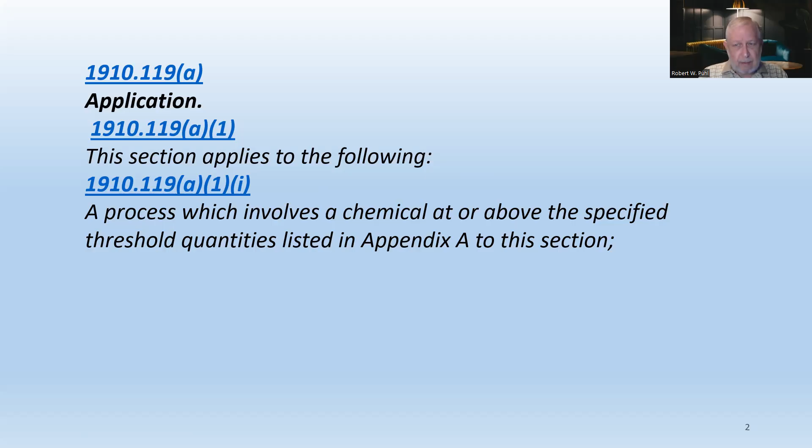So we're going to look at a part of it. This is just a very small part. This is what has the chemical name, the CAS number, and the TQ, which is threshold quantity.

You can see about the 6th or 7th line down, ammonia anhydrous. Anhydrous just means without water - pure ammonia. Ammonia is usually watered down; it likes water, it mixes with water pretty well. So anhydrous ammonia means without any water in it. And the TQ, the threshold quantity, is 10,000 pounds.

This appendix - most of the appendices in OSHA tell you if they're mandatory or not. This one's mandatory, that's for sure. And that's just the page with the A's in it. So that's a pretty big standard.

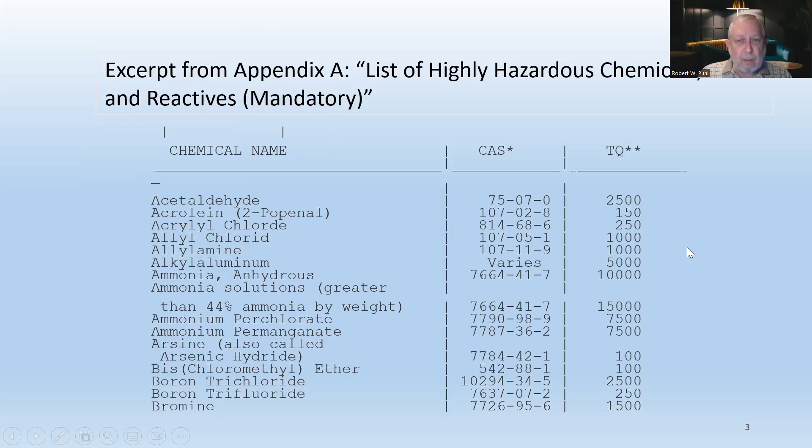So you need to make sure, of course, you have a chemical inventory under hazard communication, and you need to take that chemical inventory and look at Appendix A of this to make sure none of them are qualified under process safety management.

So a process which involves Category 1 flammable gas, as defined in 1910-1200 C, or a flammable liquid with a flash point below 100 degrees on site in one location in a quantity of 10,000 pounds or more. So this is saying, in addition to that, here's some other thing - Category 1 flammable gas, in 1910-1200, and that's your hazardous materials thing.

So that's another standard.

Hydrocarbon fuels used solely for workplace consumption as a fuel - for example, propane used for comfort heating, gasoline for vehicle refueling - if such fuels are not part of a process containing another highly hazardous chemical covered by this standard.

Flammable liquids with a flash point below 100 degrees Fahrenheit, stored in atmospheric tanks or transferred, which are kept below their normal boiling point without benefit of chilling or refrigeration.

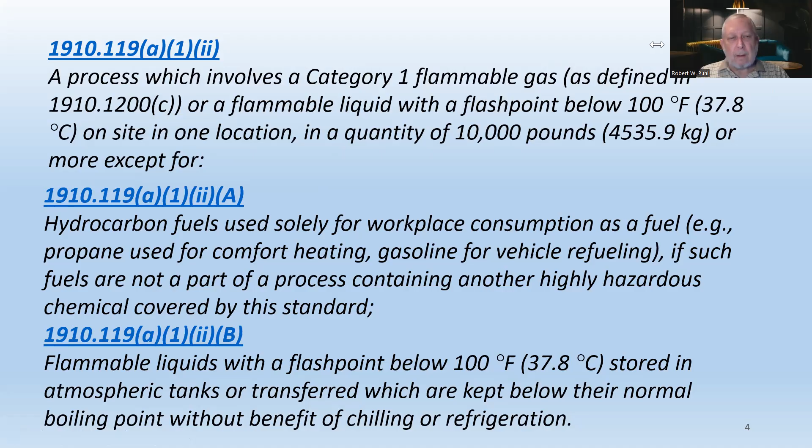This section does not apply to retail facilities - so it's a retail store, doesn't apply. Oil or gas well drilling or servicing operations - why? Again, because they've got their own rules.

Normally unoccupied remote facilities - normally unoccupied. In other words, somebody goes there once in a while to check on something, but normally there's nobody there.

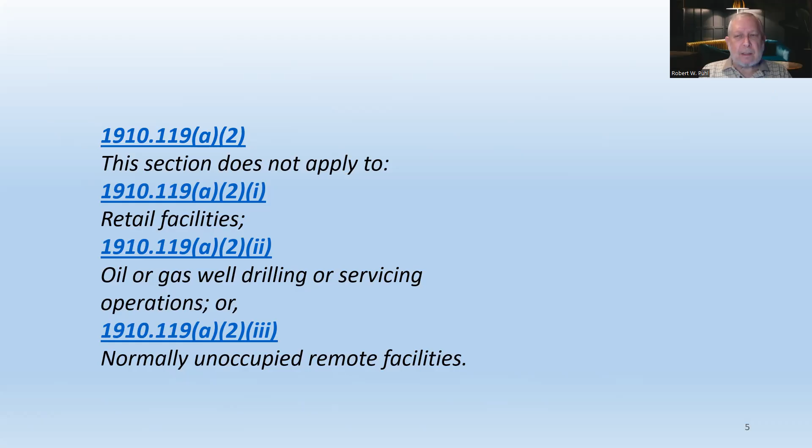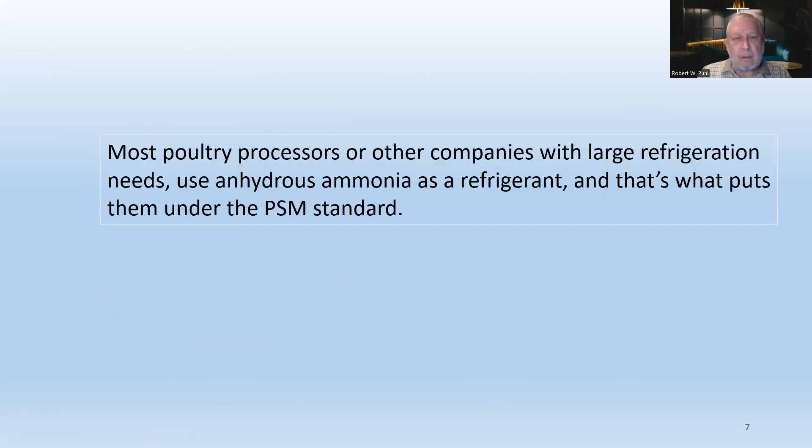Element A tells us who comes under the process safety management laws, and in some cases who doesn't. So that's what we talked about here. Most poultry processors or other companies with large refrigeration needs use anhydrous ammonia as a refrigerant, and that's what puts them under the PSM standard. These are just my notes here. So that was A, just kind of application, who it applies to.

Now, B is definitions, and most OSHA standards as big as this one have definitions. We're going to look at them.

Catastrophic release means a major uncontrolled emission, fire, or explosion involving one or more highly hazardous chemicals that present a serious danger to employees in the workplace. Well, if you have an uncontrolled emission, fire, or explosion involving a highly hazardous chemical, it's probably going to present a serious danger to employees in the workplace.

Now, remember, they say employees because this is OSHA - OSHA doesn't have any jurisdiction over the public, just the employees. That's where the EPA comes in; they cover the public. Process safety management is one of the few standards that is word for word identical in OSHA and EPA, except OSHA starts each section with 'the employer shall,' because OSHA covers employees. The EPA starts off each section with 'the owner or operator shall,' because they're concerned about the public and the environment.

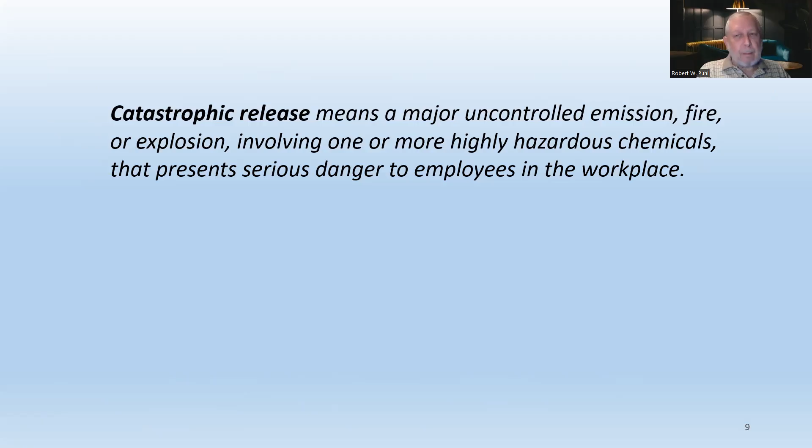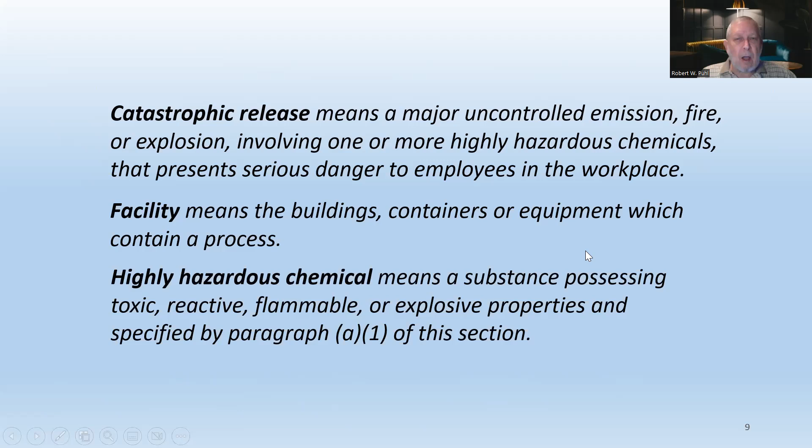It's interesting. But facility means the buildings, containers, or equipment which contain a process. Highly hazardous chemical means a substance possessing toxic, reactive, flammable, or explosive properties, and specified by paragraph A1 of this section, which we already talked about - and here's the part of A1. Okay, that's what we already talked about, so I'm not going to read it all again, but that's where that comes from.

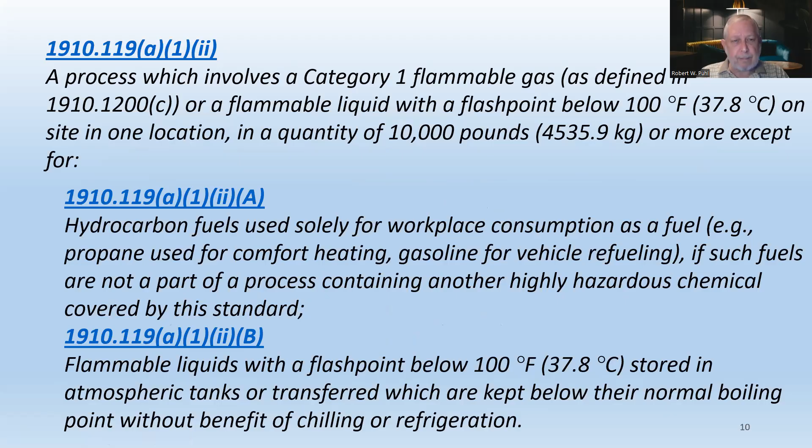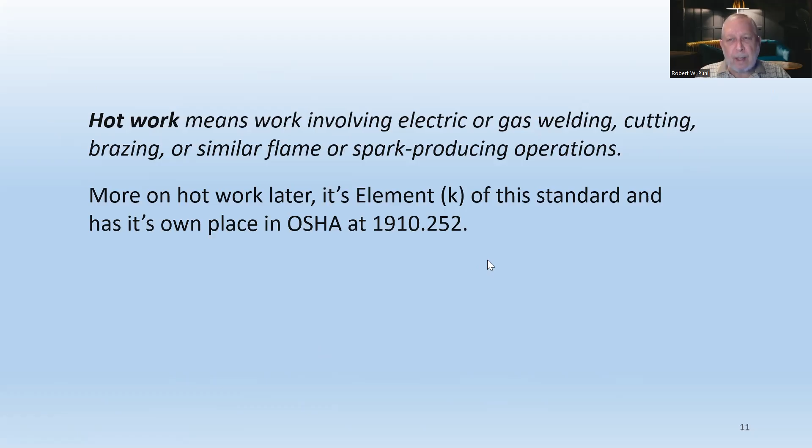Hot work means involving electrical or gas welding, cutting, brazing, or similar flame or spark producing operations. Hot work is a word that's used in a lot of sections in OSHA, but that's what it means - basically welding, cutting, brazing, grinding, anything that produces sparks, that's hot work. More on hot work later - it's element K of the standard and has its own place in OSHA 1910.252. So you can see hot work permeates several different OSHA standards.

Normally unoccupied remote facility means a facility which is operated, maintained, or serviced by employees who visit the facility only periodically to check its operation and to perform necessary operating or maintenance tasks. No employees are permanently stationed at the facility. Facilities meeting this definition are not contiguous with and must be geographically remote from all other buildings, processes, or persons.

When OSHA makes an exception like this, they have to be as meticulous as possible about defining it, because what will happen is people will try to start taking the exception and applying it to everything. So they kind of made it pretty clear here. I think they did anyhow.

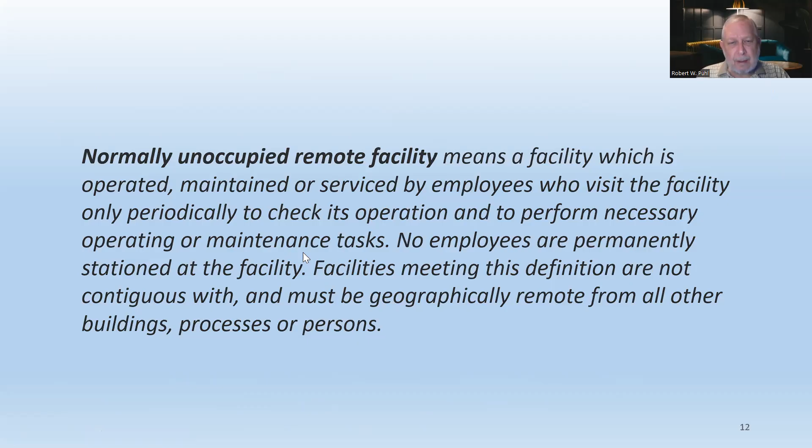Process means any activity involving a highly hazardous chemical, including any use, storage, manufacturing, handling, or the on-site movement of such chemicals, or combination of these activities. For purposes of this definition, any group of vessels which are interconnected, and separate vessels which are located such that a highly hazardous chemical could be involved in a potential release, shall be considered a single process.

So again, they want to be sure that you didn't just take these things and put them in different tanks and say, oh, we only have 5,000 here, 5,000 here, 5,000 there. We don't have 10,000 at one facility.

We had an issue because plant one and Reed Lane at OK Foods combined only had about 7,000 pounds of ammonia, while plant two had like 35,000 pounds. They were both under the same, kind of in the same building. I mean, you could get from one to the other without going outside.

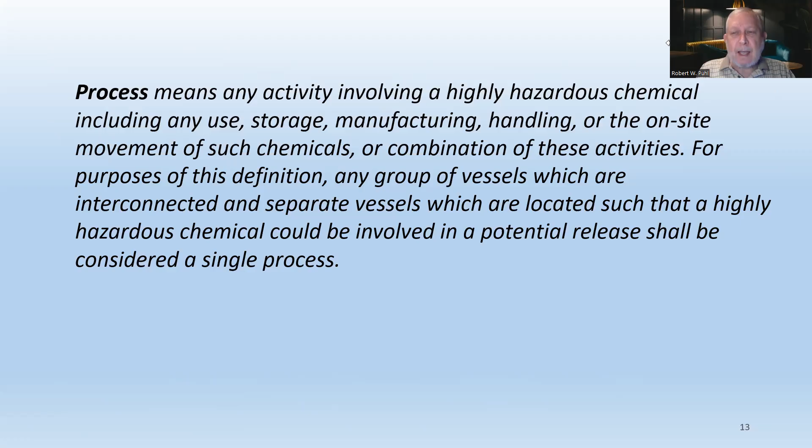So we included plant one and Reed Lane in it for a couple of reasons. Number one, they probably were in another area and by this definition come under it. Number two, we thought, look, if we don't do it and we have a problem there, they're going to say, wait a minute, you knew what to do here with this plant, you knew what rules to follow, you didn't follow them over here. How stupid is that? And you're probably going to be in trouble.

Replacement in kind means a replacement which satisfies the design specifications. This comes up a good bit in practice, because you have a valve, let's say, or something that needs replaced in your covered process.

Now, the first thing people think is they have a valve that's by company A, so they have to have a valve that's by company A. No, you don't have to have that. It has to be replacement in kind. In other words, it has to have the exact same specifications - the input, the output, the capacity of it, the operation of it, exactly the same. It could be a different brand.

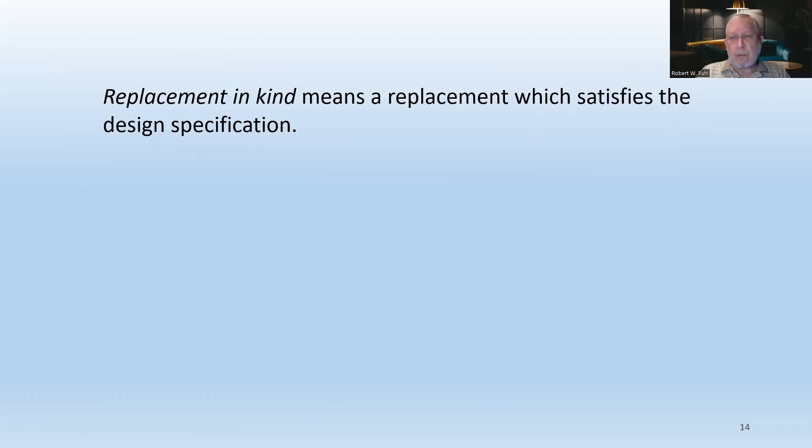Now, if you do that, replacement in kind, it exempts you from going through some other process, which we'll talk about later. But replacement in kind is an important term in process safety management. If it's not a replacement in kind, it triggers such things as management of change and pre-startup safety review, which we'll talk about later.

So again, it has to meet exactly the same specifications. It can't deviate at all - not at all, except the name can be different. It might be a different color or something like that. It might look a little different, but the specifications have to be the same.

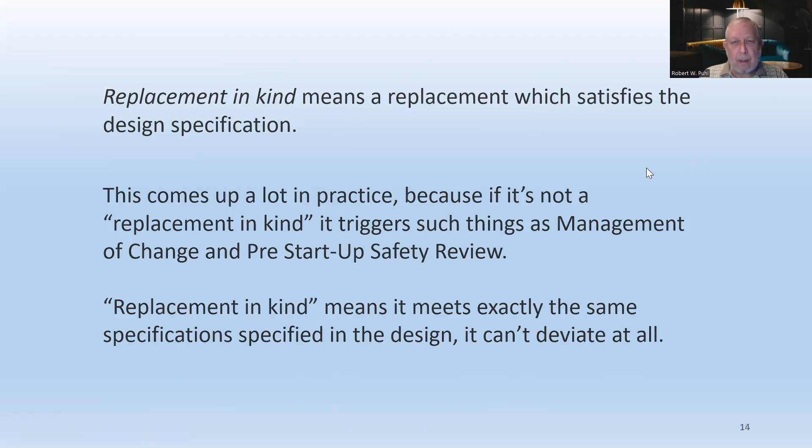Trade secret means any confidential formula, pattern, process, device, information, or compilation of information that is used in an employer's business, and that gives the employer an opportunity to obtain advantage over competitors who do not know or use it. See Appendix E to 1200, definition of trade secrets, which sets out the criteria to be used in evaluating trade secrets. And again, they're pretty strict on this too, because you can't really get out of OSHA by calling something a trade secret. You might have to jump through some hoops, but you're not going to get out of OSHA by saying, well, it's a trade secret.

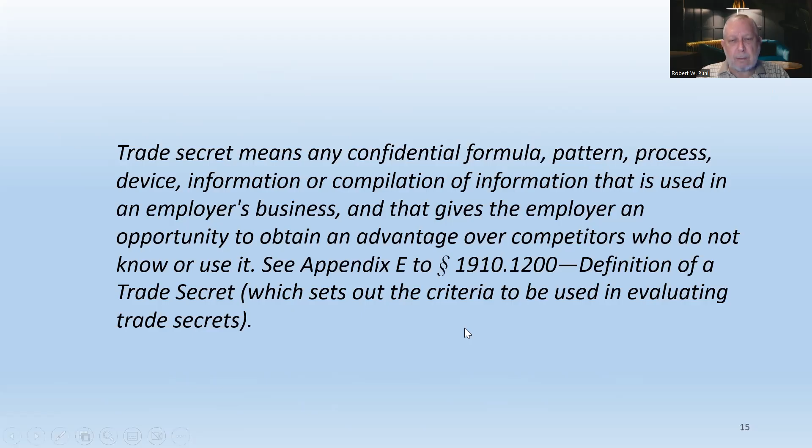Frequently, facilities use this section to add any other definitions that they may use in their program. So what we did, and I suggest you do this too, is for every section - like this is section B, for example - we broke our process safety manual into sections, one for each section of the standard, which makes a lot of sense. At the beginning of each section, we put word for word the standard, in italics, so you can tell it apart, and because they're not that big, as you can see. So we had the standard right there in our manual, and then we wrote below that our policy to enforce that standard. I thought it was a pretty good way of doing it, and Craig taught us that too.

So, employee participation. OSHA likes people to be notified of what's going on around them. And you know what? Companies should too. Employers shall develop a written plan of action regarding the implementation of the employee participation required by this paragraph. Again, it's got to be in writing. So they've got to say, what are you going to do? That written plan, that's key, is that it's written. You can't just be doing it. You have to have a written plan to do it.

For example, it's okay if we do this during orientation. We gave them a handout. They signed, maybe a short quiz about it. We told them about it. We told them we have anhydrous ammonia. It's not a secret. You can't keep stuff like this secret from your people. We gave them an orientation quiz. It was pretty short. Anyhow, PSM posting, we did that. We'll cover that in a little bit.

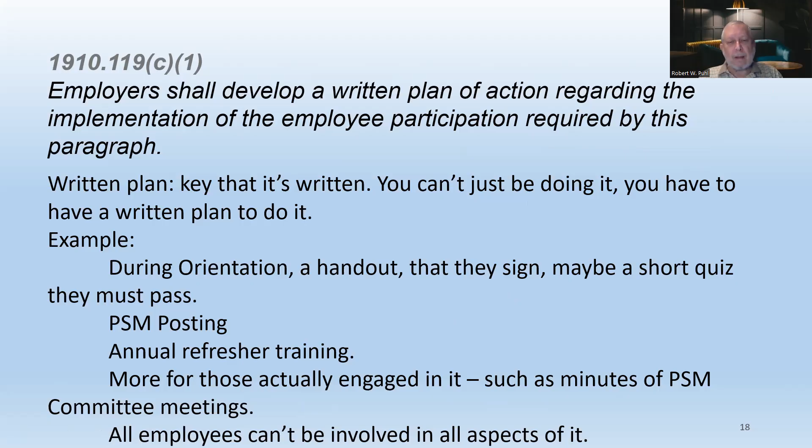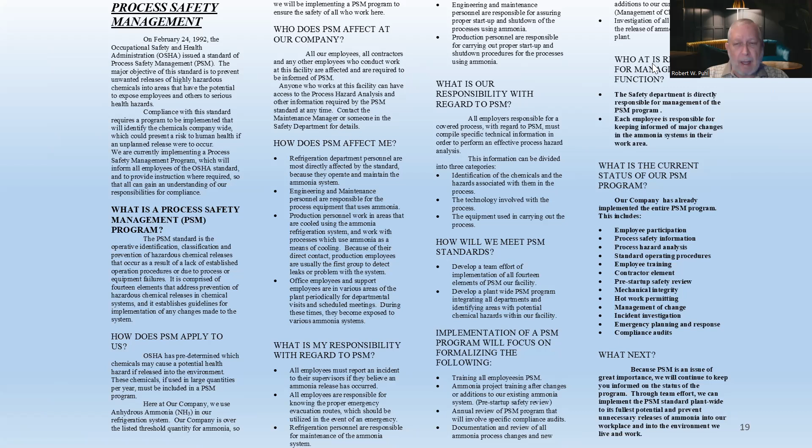This is a posting that's in OSHA, and we posted this on every bulletin board. It lists all the different things of process safety management and lets people know about it, and whether they read it or not, I don't know, but it was there for them. That's what we did. I think it's a good idea.

Employers shall consult with employees and their representatives on the conduct and development of process hazard analyses and on the development of the other elements of process safety management in this standard. Process hazard analysis, we'll talk about that in the next module. So consult with their employees and their representatives, and that usually means unions, and that's fine.

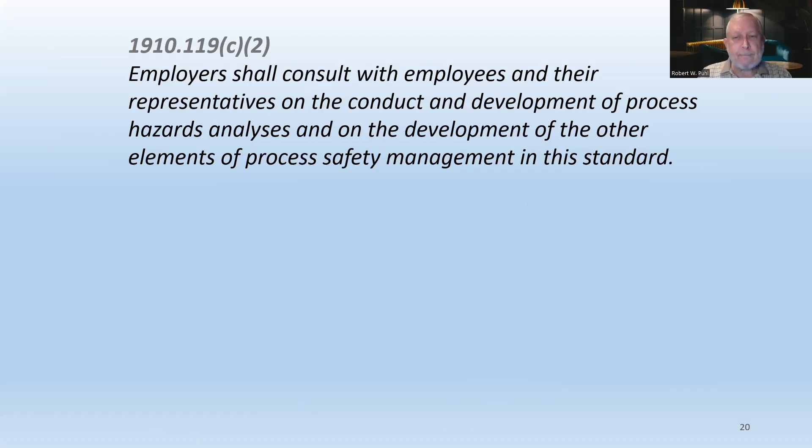Again, I've always stated this, that unions are supposed to be for the people, and the safety department basically is for the people too. You might be paid by the company, and you're trying to save the company money by all means, but by protecting the health and safety of the people, you are saving the company money. So not all employees can be consulted on everything, but those in the area where PSM is critical can. The standard is very comprehensive, so some employees can be consulted on various parts of the standard.

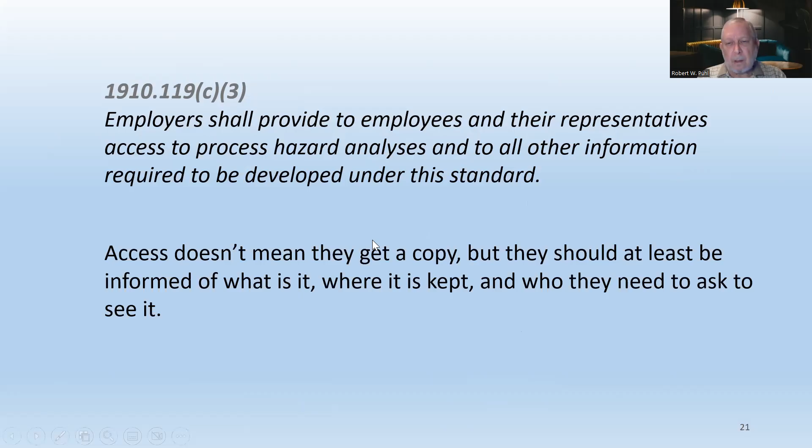Employers shall provide to employees and their representatives access to process hazard analyses and to all other information required to be developed under this standard. That doesn't mean you give it to them; they can look at it. They usually don't. Access doesn't mean they get a copy, but they should at least be informed of what it is, where it's kept, and who they need to ask to see it. Just like any other standard, the first thing the inspector will do is ask to see the written plan. No doubt about it. Just about every standard.

All right. Now, D, process safety information. Again, this is important too. In accordance with the schedule set forth in E1, which we haven't covered yet, of this section, the employer shall complete a compilation of written process safety information before conducting any process hazard analysis required by the standard. The compilation of written process safety information is to enable the employer and the employees involved in operating the process to identify and understand the hazards posed by those processes involving highly hazardous chemicals.

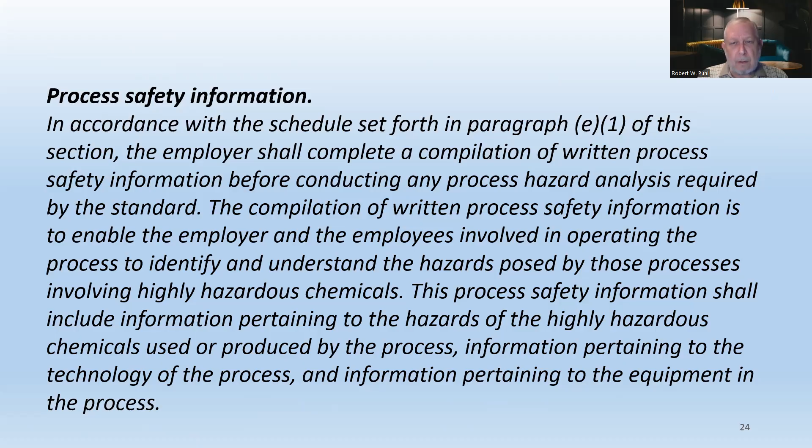This process safety information shall include information pertaining to the hazards of the highly hazardous chemicals used or produced by the process, information pertaining to the technology of the process, and information pertaining to the equipment in the process. So process safety information in paragraph D covers the chemicals and the hazards of the chemicals, the technology of the process, and the equipment in the process. So there are three main requirements of the element. There we go.

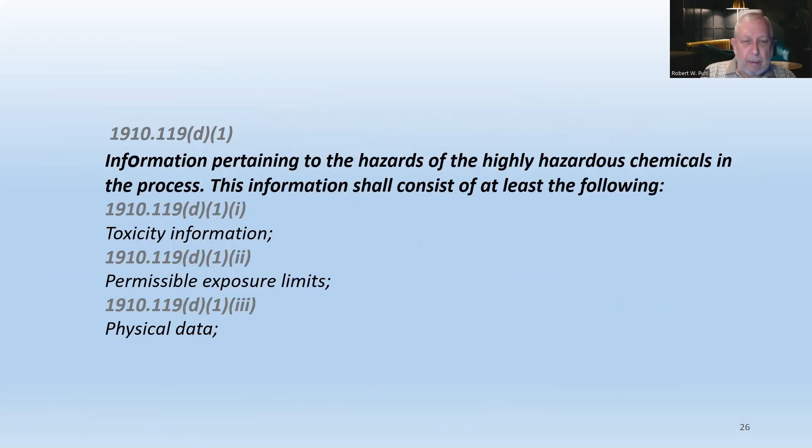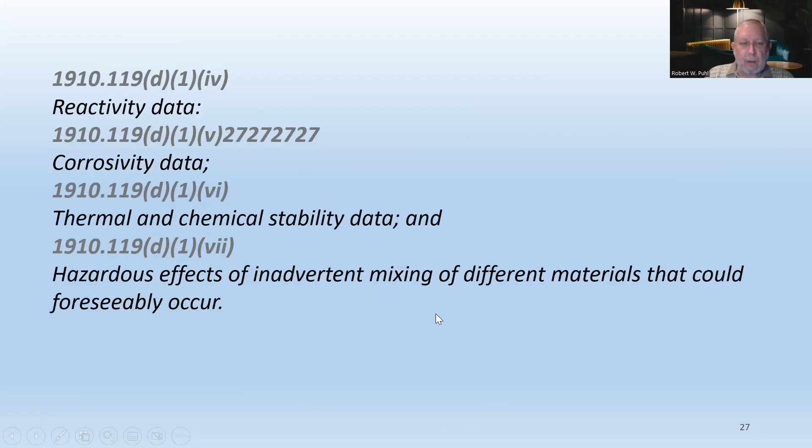The hazards of the highly hazardous chemicals in a process, the technology of the process, and the equipment in the process. Information pertaining to the hazards of the highly hazardous chemicals in the process. This information shall consist of at least the following: toxicity information, permissible exposure limits, physical data, reactivity data, corrosivity data, thermal and chemical stability data, and hazardous effects of inadvertent mixing of different materials that could foreseeably occur. Note, safety data sheets meeting the requirements of 29 CFR 1910.1200(g) may be used to comply with this requirement to the extent they contain the information required by this paragraph.

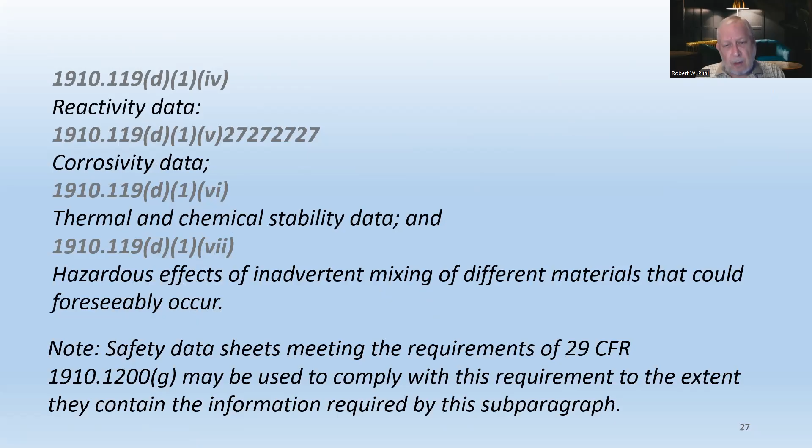And that's basically what you're doing for the hazards of the chemical. I think everybody would do this, just use a safety data sheet. You don't have to, but that's a good idea. It's allowed. Information pertaining to the technology of the process shall include at least the following: a block flow diagram or simplified process flow diagram. See Appendix B to this section. We'll look at them real quickly here. So a block flow, the flow chart type of thing.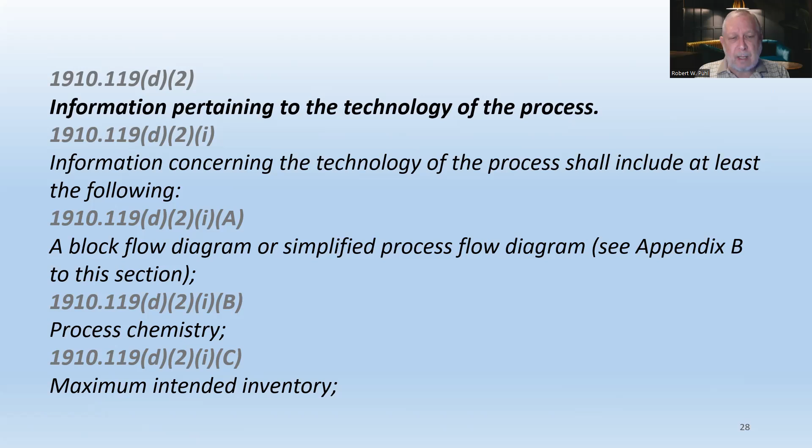Process chemistry, maximum intended inventory. Some of these definitions are vague, what's an intended inventory? If you have a 10,000 gallon, 100,000 gallon tank, let's say, the rule of thumb is you never fill more than 80% because you're going to have expansion, heat, and stuff like that. But what's the maximum? Do you take 100,000 as your maximum inventory, or 80,000 as your maximum intended inventory? Or do you only plan to keep 60,000 in it? But that's the maximum intended inventory. It's not a very clear thing.

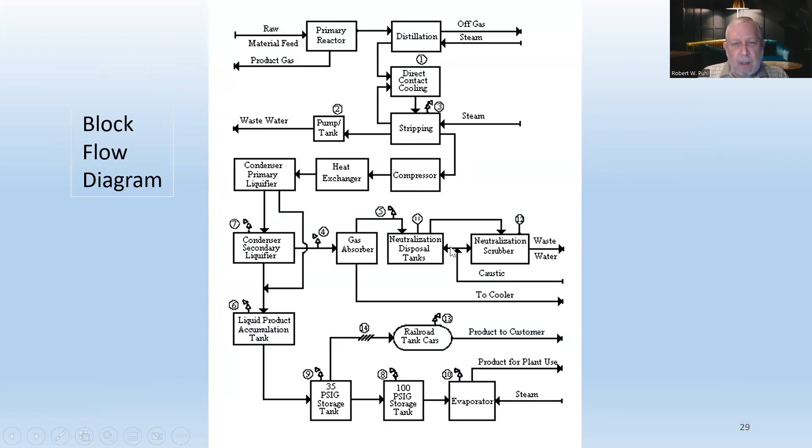This is a block flow diagram. It's not of a real thing, but just shows you different things, how the process goes. Like I said, it's kind of like a flow chart. And the next one is a process flow diagram. So it either requires a block flow or process flow, but not both. Anybody in your refrigeration department, or who works in that department, whatever it is, could lay something like this out for you. And that's to give people that work in it an idea of how this thing works. It makes a lot of sense.

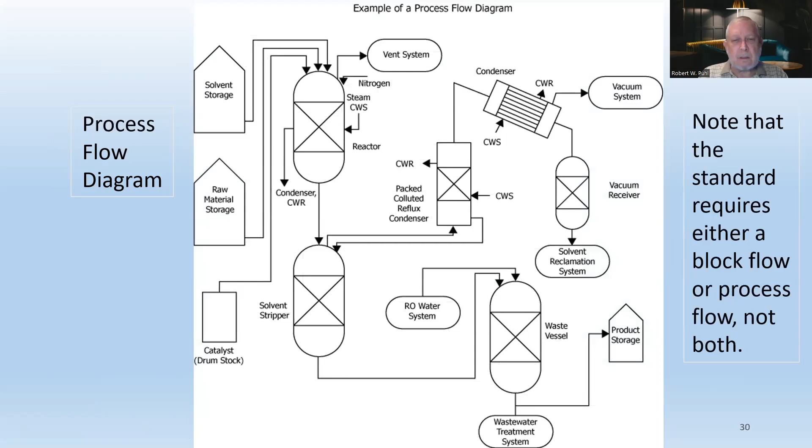Safe upper and lower limits for such items as temperatures, pressures, flows, or compositions. So in your process safety information, you need to say, okay, we have this compressor, and it has safe upper and lower limits, safe temperatures, pressures, all that stuff in there. This is where your people are going to go to find out how to keep an eye on this stuff, and how to be sure it doesn't get out of spec. So where would safe upper and lower limits for a piece of equipment come from? Oops, I thought I had my answer there. Where do you think you'd get that?

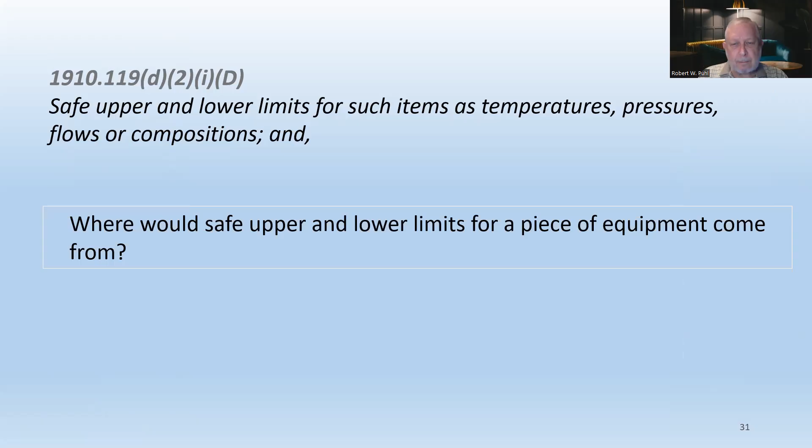The manufacturer's information. Every time you buy something as sophisticated as an air compressor or something like that, you're going to get the manufacturer's instructions, manufacturer's information. They are critical. You keep them. They are your basis for building this process safety information. They're going to tell you all this stuff about it. You need to keep that. I don't know if you do it at home, but when you get something at home, you should keep the manufacturer's instructions too.

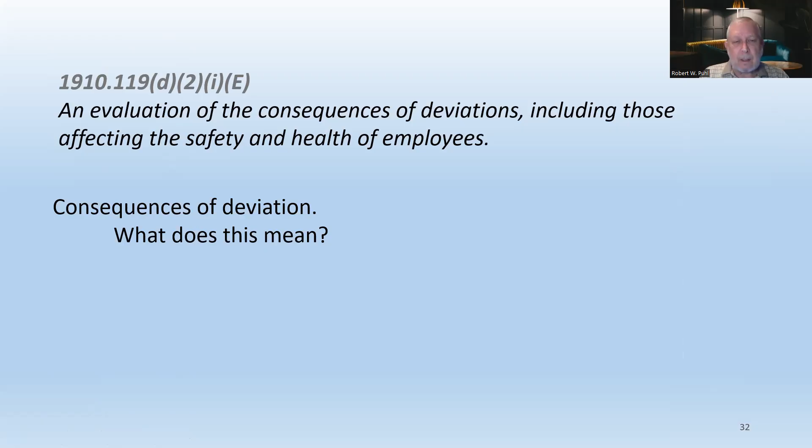Now, an evaluation of the consequences of deviations, including those affecting the safety and health of employees. Consequences of deviation shows up in process safety management a little bit. What does that mean? What's a deviation? Well, deviation means you're outside of the range that's acceptable, right? You're deviating from a safe range, whether that's, let's say, the PSI of a tank. So what happens if there's a deviation, the consequences of that deviation? What it means is what happens if something goes out of whack, out of spec, out of tolerance. It could blow up, for example, or could release through a pressure relief valve.

Where the original technical information no longer exists. Okay, now this happens in real life, so give OSHA credit for doing this. Now, the longer we go, of course, the less this is going to happen. But you might have a piece of equipment that predates this standard. Very possible. So when the original technical information no longer exists, maybe the company's out of business. Who knows? You got this thing, you've been using it, works fine, but you don't have the manufacturer's instructions anymore, and your manufacturer's kaput.

So such information may be developed in conjunction with the process hazard analysis in sufficient detail to support the analysis. So you still have to have information on it, but you might be able to develop it on your own. So just because you don't have the original information is not an excuse to not have decent process safety information. The other alternative you have, get rid of it, get another one.

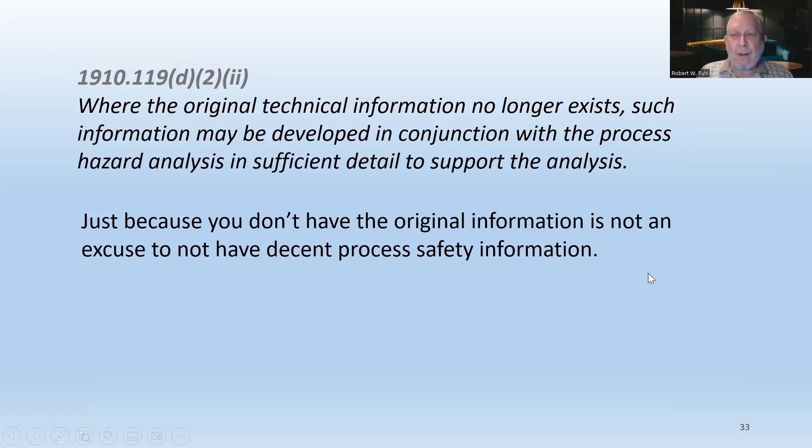So they're not going to let you off the hook. "Well, I'm sorry, this company's out of business, so we don't have it." Too bad. You're not off the hook with process safety information. Again, if there is an out like that, people would take it. And then what good would the standard be?

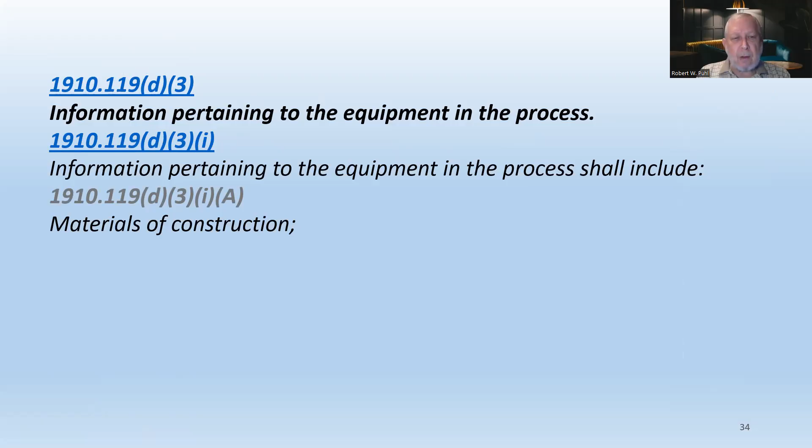Information pertaining to the equipment in the process. This is a big part of it. Information pertaining to the equipment in the process shall include the materials of construction, piping and instrument diagrams, P&IDs. We'll talk about them like this. This is the piping and instrument diagram.

These were huge at OK Foods. They were hanging on a wall. Sometimes they were in charts, hanging on like flip charts. They would go through them. They could be huge. But a P&ID, piping and instrument diagram.

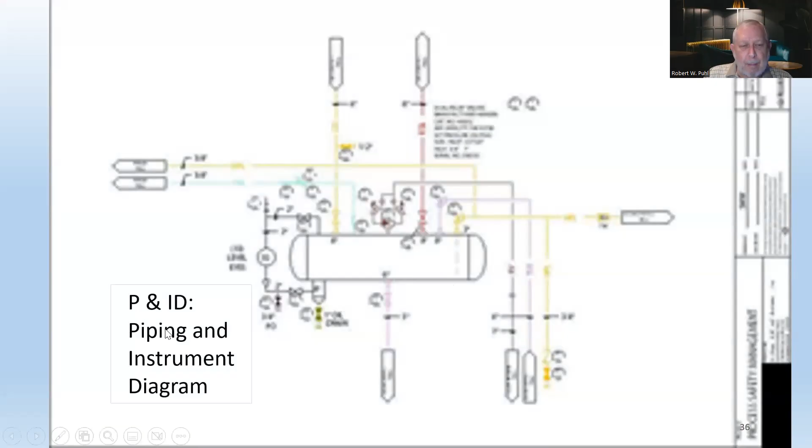Relief system design and design basis. So relief system design and design basis. The relief system is the pressure relief system. The electrical classification, skip that, has to be in there too. So a relief system, all pressure vessels have a pressure relief valve.

Well, for something small, like an air compressor, that's air in it, if it releases, it's just air, right? But if a tank full of highly hazardous chemical releases, you don't want it releasing into the plant. You want it releasing outside. Generally speaking, it has to release 15 feet above the floor working surface, or the highest people can be. And that makes a lot of sense. So you have to have the design and the basis for the design of your relief system.

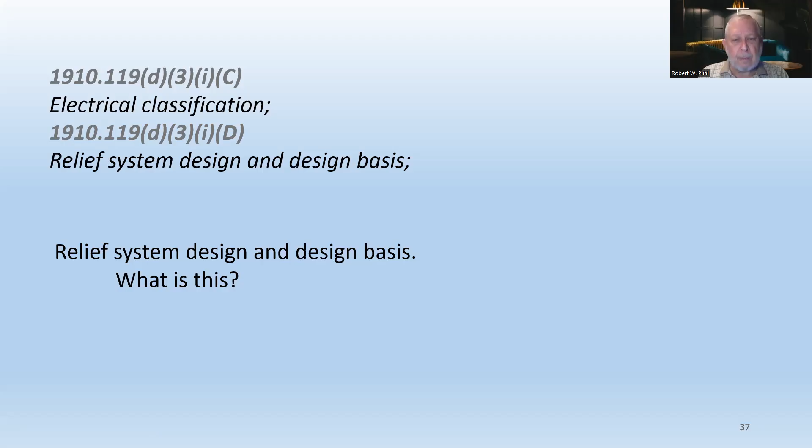Most relief systems, pressure relief systems, like, you may have 3 tanks. They don't all go up the outside. They go together somewhere, and that goes outside. And that's fine as long as it's designed properly. So that's what you have to have in your process safety information.

Ventilation system design. Most times, highly hazardous chemicals give off nasty stuff, nasty fumes or gases. So you have to have a ventilation system. You might also have a ventilation system that automatically comes on when you have an emergency, when it gets so many parts per million of this. Your ventilation comes on, your louvers, or some windows or doors open, or walls even open up to get air out of there and get that stuff out of your building.

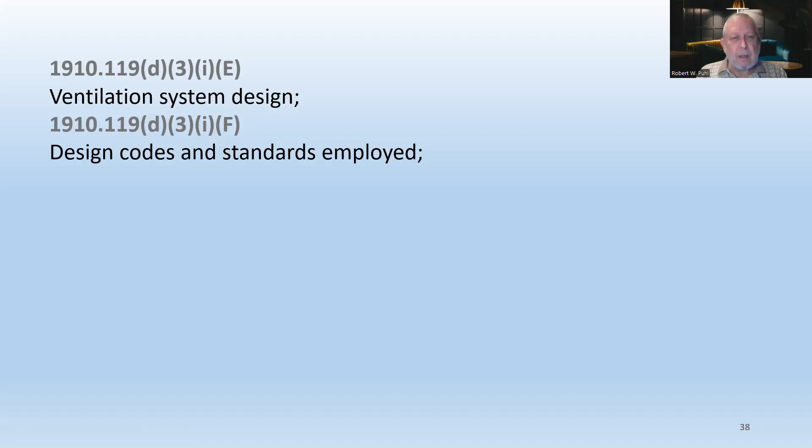So design codes and the standards employed, the material and energy balances for processes built after May 26, 1992, and safety systems, interlocks, detection or suppression systems. That's very important. You're going to have a lot of safety systems. We had ammonia alarms. Usually 25 parts per million was a warning, and at 50 parts per million things start kicking in. Or suppression systems.

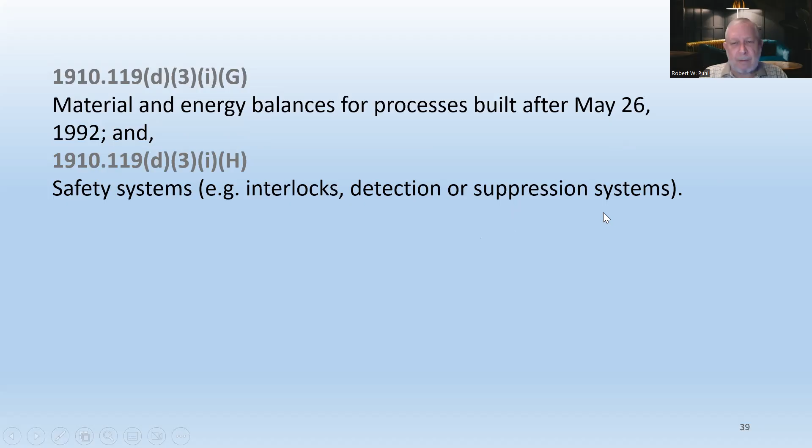Remember, these could have different chemicals, not just anhydrous ammonia. So you might have a suppression system. You might have, let's say, a water system that comes down and takes the stuff out of here. The employer shall document that equipment complies with recognized and generally accepted good engineering practices. You've heard that term before. It's called RAGAGEP, recognized and generally accepted good engineering practices.

So that's another one of those things that OSHA uses, kind of like the general duty clause, that you can't get out of by using any other excuse. If you don't have the manual, or the stuff's old, or whatever, doesn't matter. You still have to comply with recognized and generally accepted good engineering practices.

For existing equipment designed and constructed in accordance with codes, standards, or practices that are no longer in general use, the employer shall determine and document that the equipment is designed, maintained, inspected, tested, and operating in a safe manner. Again, you can't get out of it by saying these construction standards are no longer in use. You still have to document that it's designed, maintained, inspected, tested, and operating in a safe manner.

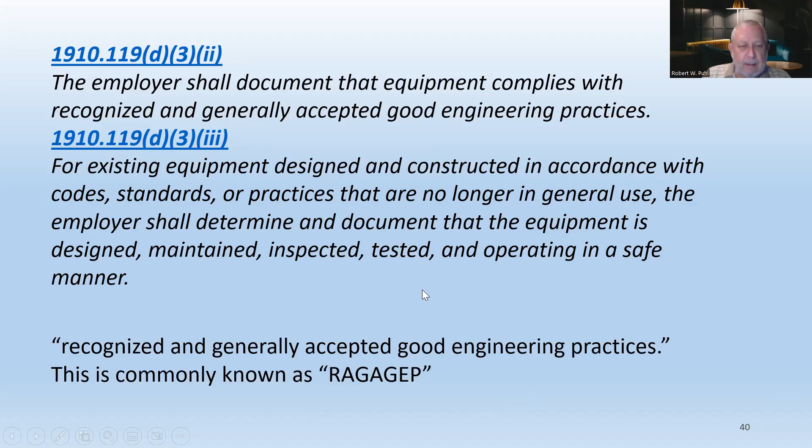Recognized and generally accepted good engineering practices, commonly known as RAGAGEP. And you've heard that before in this course, I believe. So that's the first 4 sections, paragraphs you can call them A, B, C, and D, of process safety management. We're going to cover this in like 3 different modules.